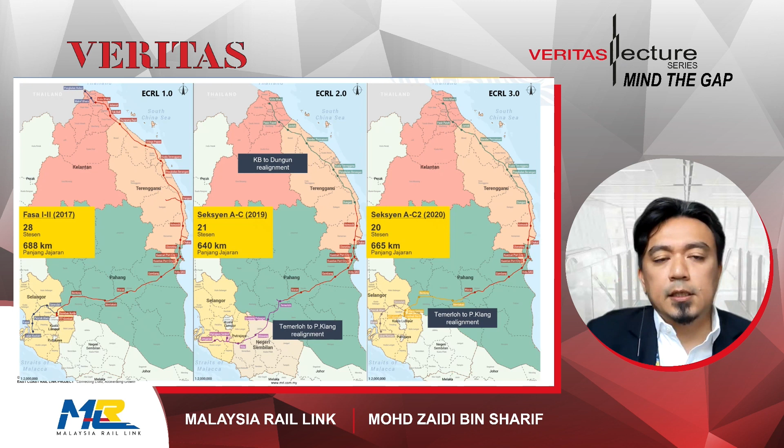Just a little bit of history on ECRL - it has been in the news quite many times, there's three versions already of it. ECRL 1.0 is the project we agreed on back in 2016-2017. It had two phases, phase 1 and phase 2, with 28 stations, and the length of the alignment was 688 kilometers. Then back in 2018, the project was suspended for about 9 months, to allow the federal government back then to review the project. Pretty much all the mega projects back then were reviewed very extensively by the federal government, including ECRL.

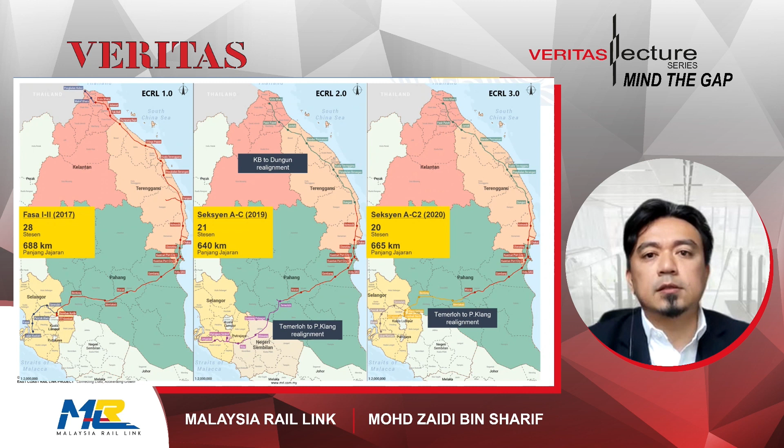Throughout that 9-month suspension, project revision was done, and also negotiation with the Chinese government was done to see how the project could be further refined, especially how construction costs could be reduced.

Back in 2019, we agreed to ECRL 2.0, where some realignment was done compared to ECRL 1.0. The number of stations was reduced to 21, and the length shortened to 640 kilometers. The realignment happened in two parts: from Kota Bharu to Dungun, and from Temerloh to Port Klang. There was a big realignment from Temerloh to Port Klang, realigned towards the south part of Klang Valley, going into Negeri Sembilan, crossing Putrajaya, Jenjarom, before arriving in Westport in Port Klang.

But recently, in April this year, the Minister of Transport announced that ECRL will be reverted back to its original alignment, as conceived back in 2016-2017. However, that only focused on the section from Temerloh to Port Klang. The section from KB to Dungun stays as ECRL 2.0, but the Temerloh to Port Klang section is reverted back to its original alignment, passing through Bentong, Gombak, Serendah, Puncak Alam, Kapar, before arriving at Jalan Kastam Station, and it will be connected to both Westport and Northport.

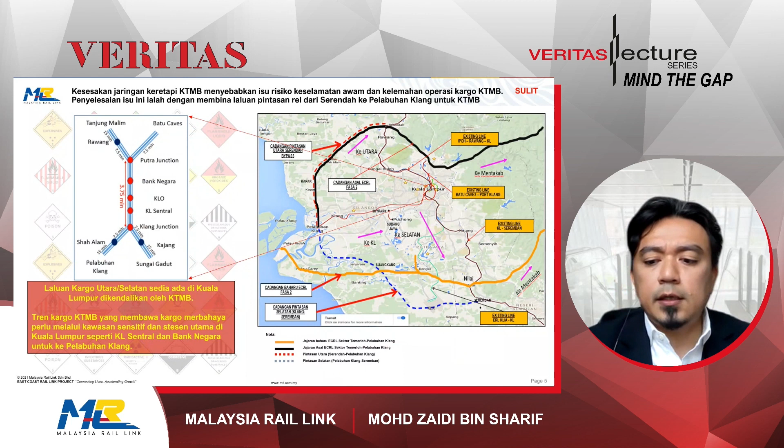However, since the alignment was realigned to the southern part, this Serendah bypass cannot be completed if we follow ECRL 2.0. So the Minister of Transport wanted to solve two projects in one go—ECRL plus the Serendah bypass—therefore reverting it back to the original alignment and confirming the ECRL 3.0 alignment. This is how it will look once ECRL 3.0 is completed: it will function as a bypass line for KTMB and also an access line for ECRL to reach Pelabuhan Klang.

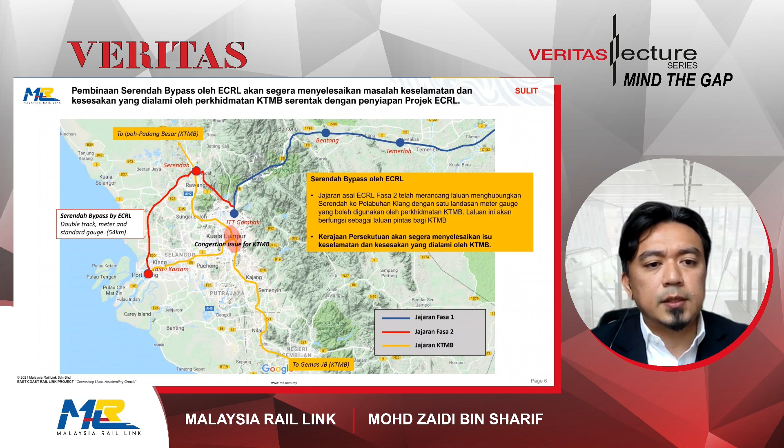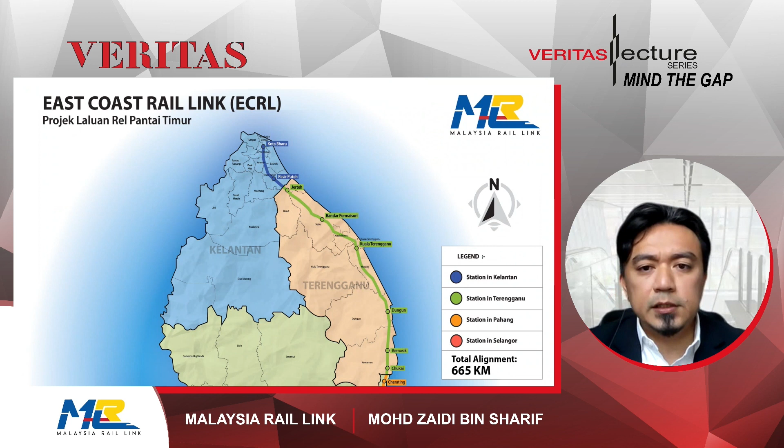This is the overall alignment for ECRL, starting from Kota Bharu going down south to Pasir Puteh, Jerteh, Bandar Permaisuri, Kuala Terengganu, Dungun, Kemasik, Chukai, Cherating, then into Pahang. Kuantan Port City is going to be our major station and depot, then it goes towards the western side of Malaysia, passing through Kota SAS, Paya Besar, Maran, Temerloh, Bentong, and then to our main passenger station for Lembah Klang, ITT Gombak.

It goes to Serendah, where we will interchange with KTMB, and then towards Jalan Kastam in Port Klang, passing through two locations identified for future stations in Puncak Alam and Kapar. Jalan Kastam is an existing KTMB station, and we will be side by side with KTMB again there.

From Jalan Kastam, we have enhanced this alignment by providing interconnectivity to ports. There is an existing rail track from Jalan Kastam station to Northport and Westport for KTMB on a meter gauge line.

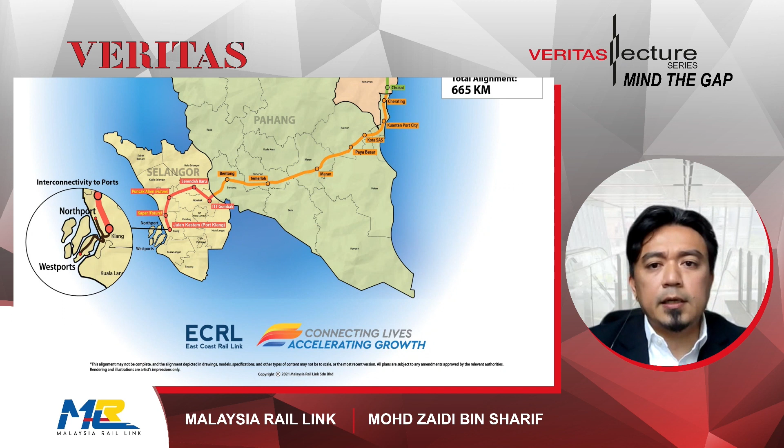However, the previous alignment in ECRL 1.0 will only terminate in Jalan Kastam. It will not be able to enter into Northport and Westport. But in 3.0, the enhancement we have made is to upgrade this KTMB meter gauge track into a dual gauge track, and this extension will enable ECRL trains to access Northport and Westport directly. This is very advantageous for ECRL to complete the idea of our land bridge connecting Port Klang and Kuantan Port City.

So again, this is just another list of the stations. We will have 20 passenger stations. Out of those 20 passenger stations, 10 will be equipped with freight facilities, so we call them integrated passenger and freight stations. These freight stations have been identified due to the requirement for that area to have a freight station.

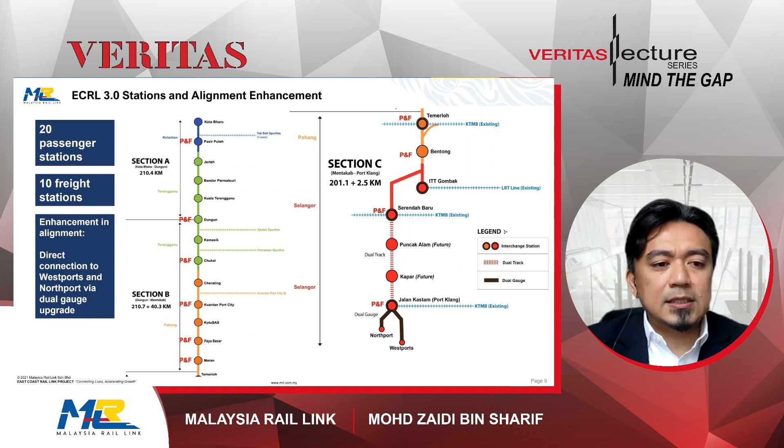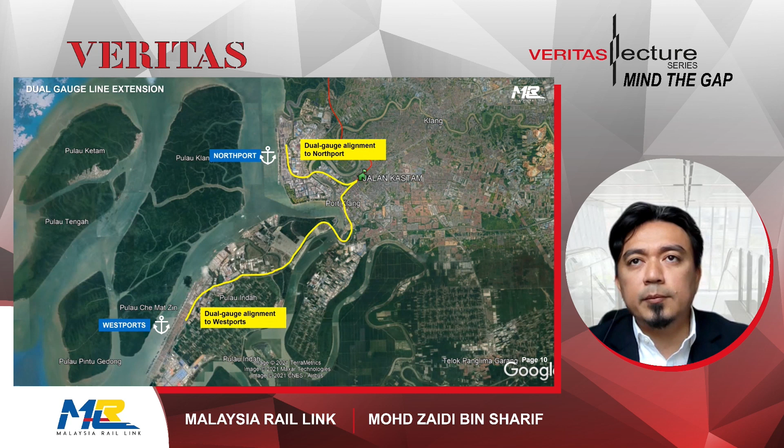Like I mentioned, the enhancement for ECRL 3.0 is that direct connection to Westport and Northport via a dual gauge upgrade of the existing KTMB meter gauge line. This is how it looks like, the dual gauge extension from Jalan Kastam into Northport and Westport. With this enhancement, ECRL cargo trains will be able to access right into the port area of Northport and also towards Westport. This is a big improvement if you compare. Although we always said that ECRL 3.0 will be taking the ECRL 1.0 alignment, in 3.0 we have made some enhancements to make it even better.

In terms of passenger connectivity, this is how it's going to look for ECRL when it interconnects with other rail lines, especially in the Klang Valley. We are going to interconnect with KTMB in Temerloh, and also in Serendah Baru and Jalan Kastam. You can see how tight we are with KTMB on the northern alignment, as we go side by side with KTMB from Serendah to Jalan Kastam. In fact, in Kapar and Puncak Alam also, we might be able to interchange with KTMB.

With the existing LRT line from ITT Gombak, we will build a station that will be interconnected with the existing ITT Gombak station, which at the same time will also have the bus terminal in that area. Gombak will remain as the main gateway for Klang Valley people to travel by road towards the east coast. This is a big plus for Gombak and for Selangor if we go with the northern alignment. Once you reach ITT Gombak, you can interchange with the LRT line, and then reach a bigger station at KL Central.

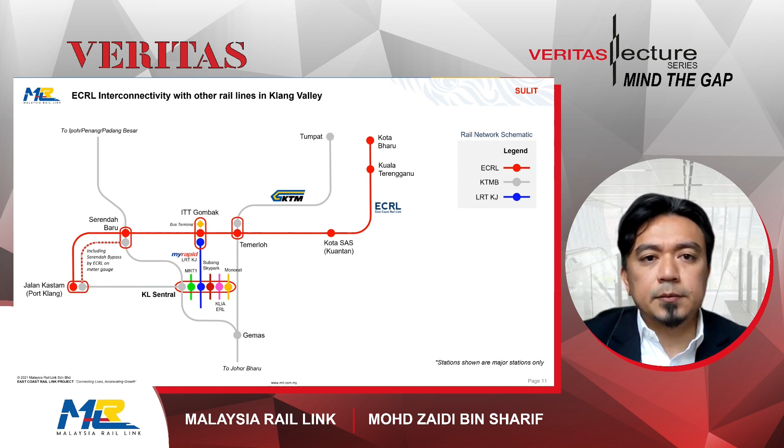So I think during the opening speech, Datuk Isham Ishak also mentioned how rail transportation is able to contribute to cutting down carbon emissions. I think ECRL has made that conscious decision rather than going with diesel powered trains, we are going with electric powered trains. This will reduce a lot of carbon footprint for the project once it's operational.

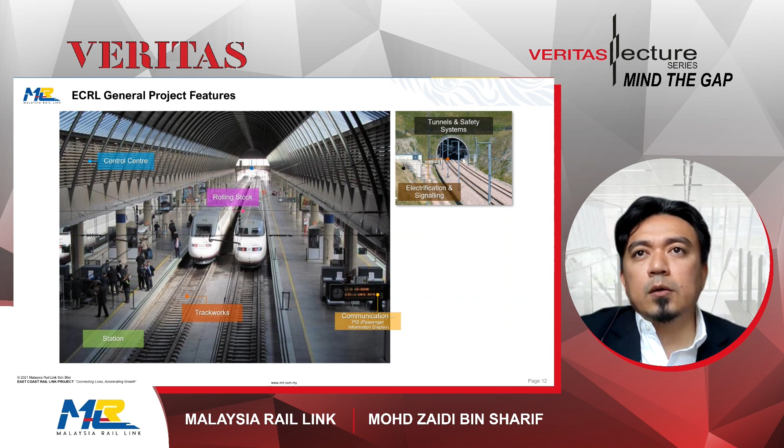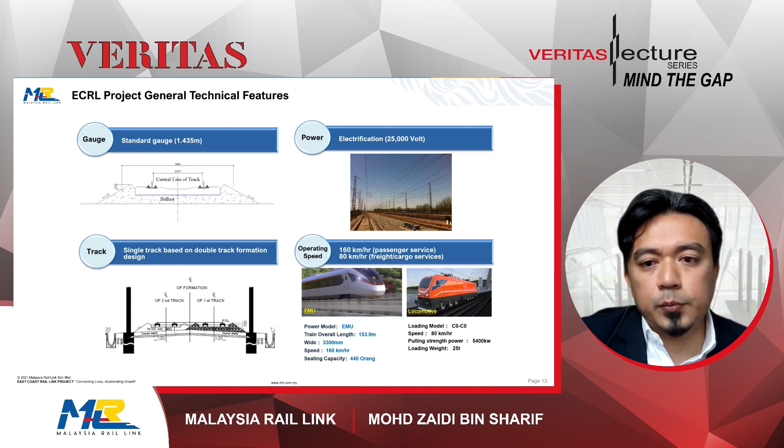160 km is not in the category of high-speed rail yet. Definitely not. 160 is just slightly faster than the current ETS service by KTMB. 80 kilometers an hour for the locomotive pulling the freight and cargo services.

For rolling stock, we're going to have about 11 EMUs, electrified multiple units, which are the passenger trains. We're also going to have 18 locomotives and about 1,000 wagons for the system. So you can see we're going to have a much bigger fleet for the cargo service, because this project is actually focused more on improving cargo transportation between Klang Valley and the East Coast.

Dr. Isham also mentioned how important it is to ensure public transport is comfortable. I think ECRL is really going towards that direction. Our trains are going to be wider and bigger, comfortable with Wi-Fi connection available throughout your journey, compared to flying where you're disconnected. It's not going to be tiring. If you board one of our trains, it's going to be a comfortable journey from your first station until your destination.

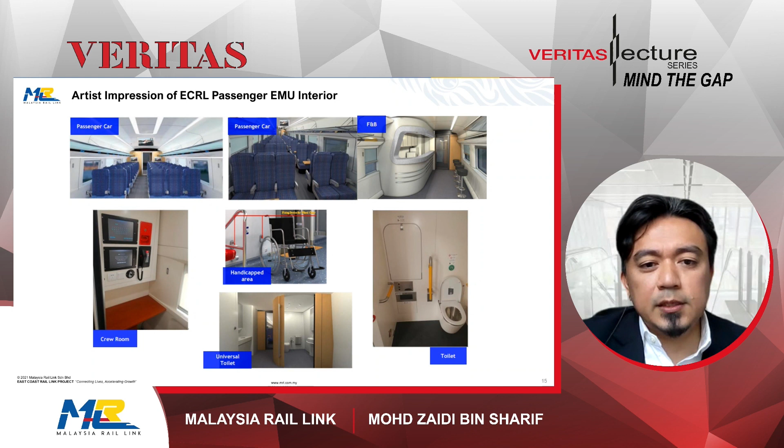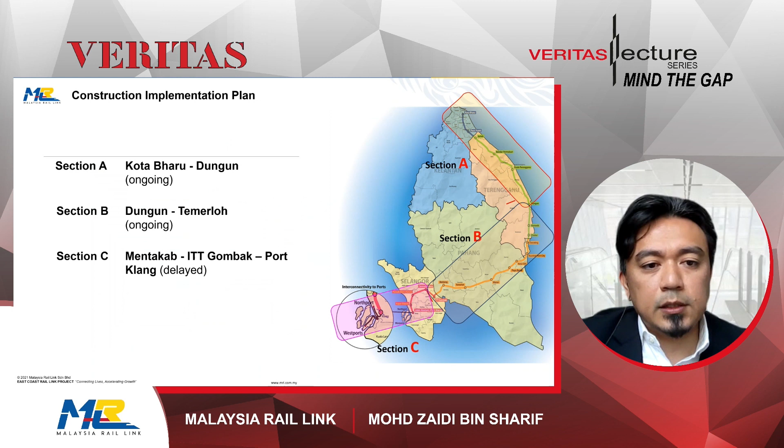Okay, jumping into the progress of the project. It should be completed by the end of 2026. The construction is divided into 3 sections: KB to Dungun, Dungun to Temerloh, and Mentakab to Port Klang. Section A and B is ongoing. However, section C from Mentakab to Port Klang has been slightly delayed. Negotiations and discussions are ongoing with the Selangor State government. Hopefully we can resolve that matter soon, so the service date will remain by end of 2026 or early 2027.

In terms of project progress, we are slightly behind schedule, at 25.09% complete. I can say that the project has performed pretty well despite facing the global pandemic, as we are only about 1 point something percent behind schedule.

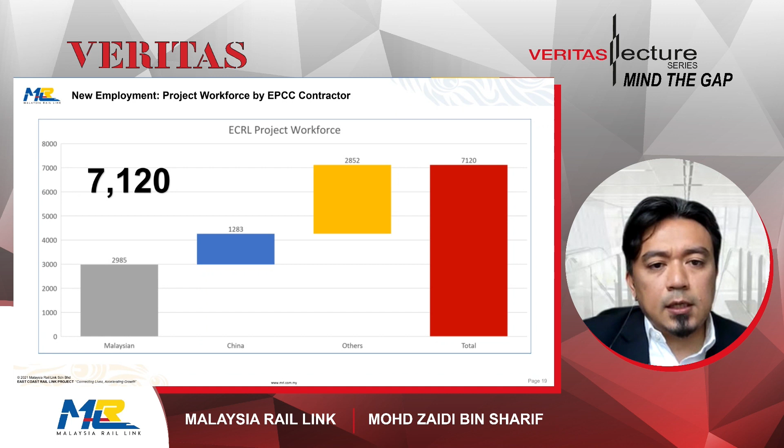In terms of employment, this is one of the socio-economic benefits a lot of people were asking us about, what is the benefit to the local community? In terms of workforce, more than 7,000 people are already working for the project, and almost 3,000 of them are Malaysians. This is just the workforce of our EPCC contractor, direct employees and their subcontractors. So this project has given a lot of new employment opportunities to Malaysians, and generally generated more economic activity in the country.

I think this gap is what the government is trying to bridge, and transportation is one of the major areas of infrastructure that needs to be improved, so that the East Coast economic region can unlock its true potential, opening up new areas for economic development.

A study in 2016 showed that ECRL is able to generate 141.6 billion in total economic output for the country, and from that, 55.7 billion in GNI. GNI is what economists call money in Malaysians' pockets, so a total of 55.7 billion ringgit is to be generated and go into our national GNI figure.

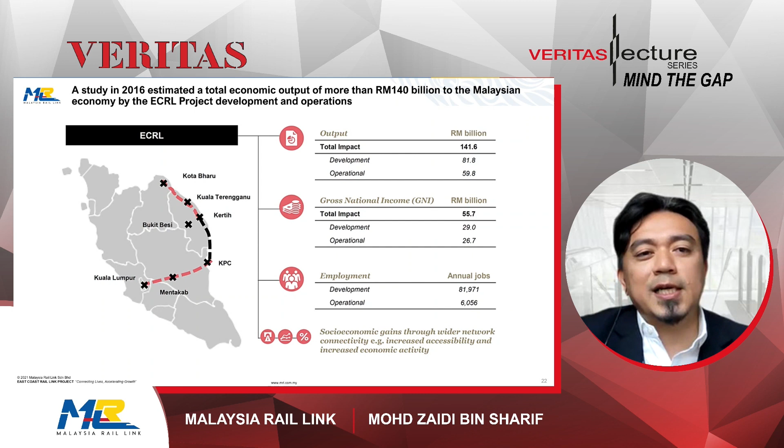What they cannot calculate is the convenience we will provide for people to travel back to their kampong, and the happiness of parents residing in Kota Bharu or Kuala Terengganu when their children come back for Hari Raya. Those are things that cannot be calculated by economists, I guess. So there's a lot of socio-economic benefit that will come from this project.

By 2035, in terms of cargo, we will carry up to 40 million tons per annum. That is the projection that has been done. In terms of passengers, up to 5 million passengers will use it by 2035. So in terms of revenue, it is still focused 70% on freight and 30% on passengers.

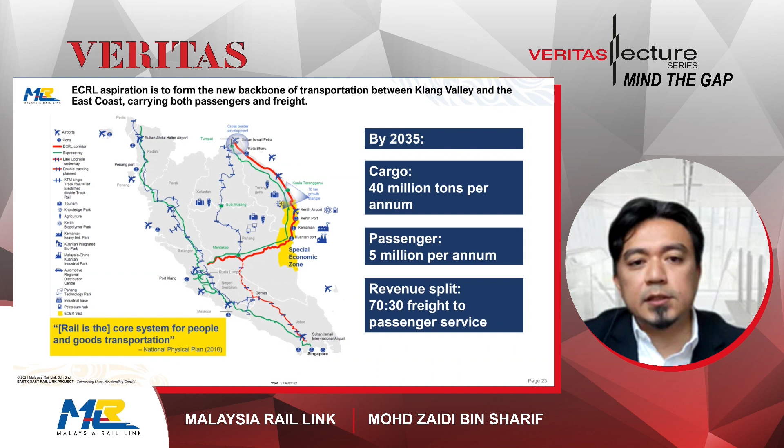The benefit is really to lower transportation costs between Klang Valley and the East Coast region. For freight, it will lower about 40 to 50% of transportation costs versus road. This is a huge competitive advantage that can be captured by manufacturers that will be using our service.

I've been talking to one very big manufacturer in Terengganu, and they are very excited to know that with ECRL, since they produce a lot of volume, and right now they are using trucks to export their products, with rail they can reduce transportation costs by 40 to 50%, and even send their cargo straight to Port Klang for export. That is one very big advantage created for this existing manufacturer.

Therefore, we hope following this lead, many more manufacturers will actually set up shop in the East Coast region, and it will actually boom this area.

In terms of passengers, versus car, it's 30 to 50% lower cost. It will enable business growth and encourage tourism, because in Kelantan, Terengganu, and also Pahang, Cherating area, Bandar Permaisuri, these are all very beautiful beaches. With ECRL, the traveling time to get to these locations will be cut down, and the cost to get there will also be cut down.

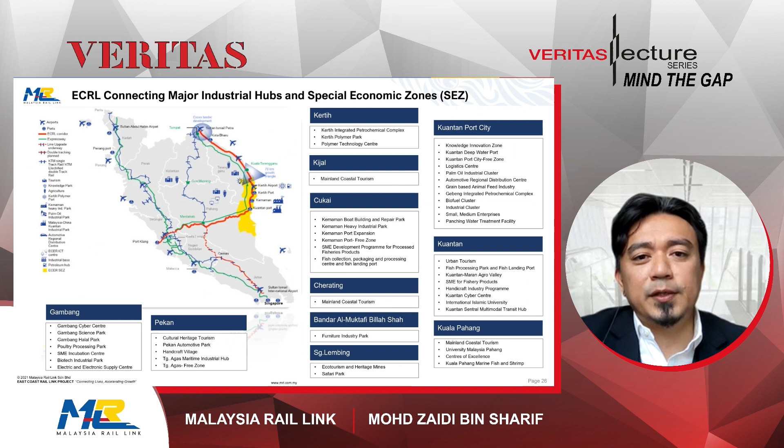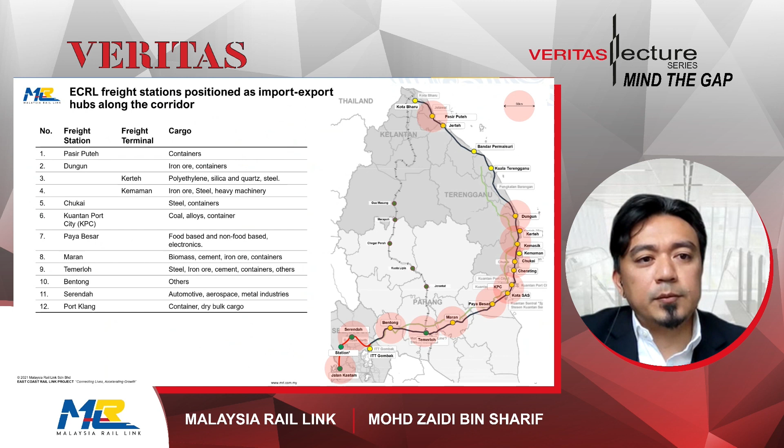So these are just the list of all the industrial hubs that we're going to pass through - you can, maybe you cannot see, it's very small now. These are the list of our freight stations and the type of cargo we have identified coming from those stations. I think I do not have to go through one by one.

Gebeng, Kerteh - these are big existing industrial parks. We are going to provide a lot of logistic support for this area. In Tembulang, Mentakap, there is forestry industry for logging and paper manufacturing, and Pahang Technology Park in Gambang.

These are all major industrial hubs and special economic zones that ECRL will pass through.

I would like to spend some time explaining the cargo land bridge between Kuantan Port and Port Klang that we're going to establish. A lot of people were thinking about this land bridge acting as a bypass to Singapore, but in MRL we put more emphasis on value-adding activity along the land bridge rather than just pure transshipment.

Meaning that if you have cargo coming from, say, China, you can send it to Kuantan Port, maybe semi-finished or unfinished product. Along the way between Kuantan Port and Port Klang, you can send it to your manufacturing plant to finish it, and then the finished goods can be sent to Port Klang for export to the other side of the globe.

And vice versa - it can also come from Port Klang and go out from Kuantan Port. This value-adding manufacturing process is key to making this land bridge work to its true potential.

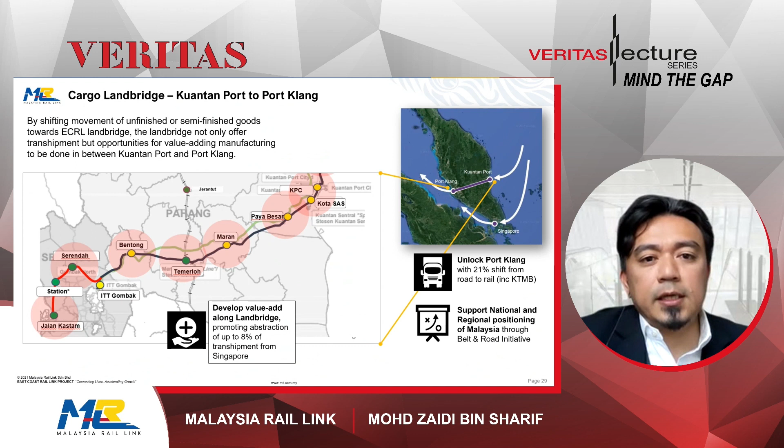On TOD, transit-oriented development - I don't have time to discuss this fully, but some of the ECRL stations will have high potential for TOD development, though not all, since ECRL passes through a lot of rural area. Our major stations in the state capitals can be developed, with some TOD around them - for example, in Kota Bharu, Kuala Terengganu, Kota SAS, Bentong, ITT Gombak, Puncak Alam, and Jalan Kastam.

We can bring some of the undersea cable to utilize ECRL's right of way, our corridor, and bring it onshore instead of going around as undersea cable, which is not easy to maintain if there's any issue. But once you take it onshore and run it along the ECRL corridor, ECRL connects two points - Kuantan and Port Klang.

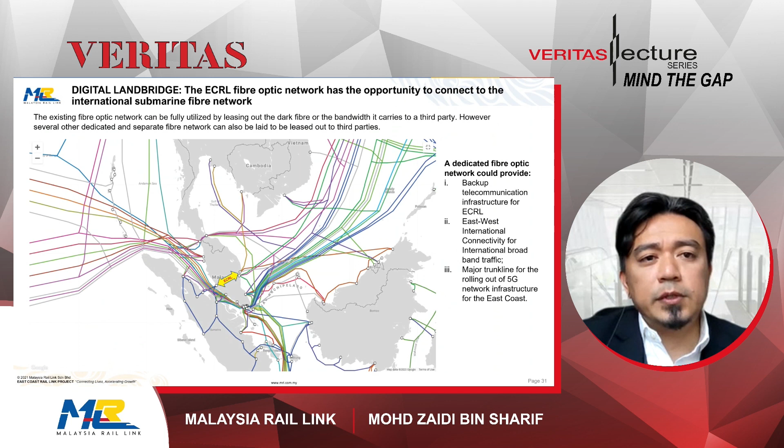So if we can utilize the corridor as a digital land bridge, ECRL will not only transport cargo but also bandwidth. This is the big picture - a high-level concept we're thinking about.

We also have some high-level thinking on an integrated utility corridor for ECRL. The corridor can be utilized by many other utilities - for example gas, water, and power - because we do have our own 33/11 kV and 0.4 kV distribution cable throughout the alignment.

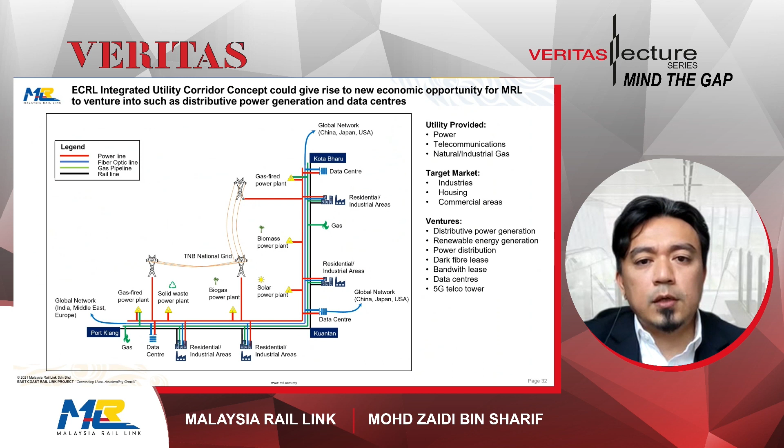I guess I've really run out of time here, and that's all from me. I'll pass it back to you, Kayi.